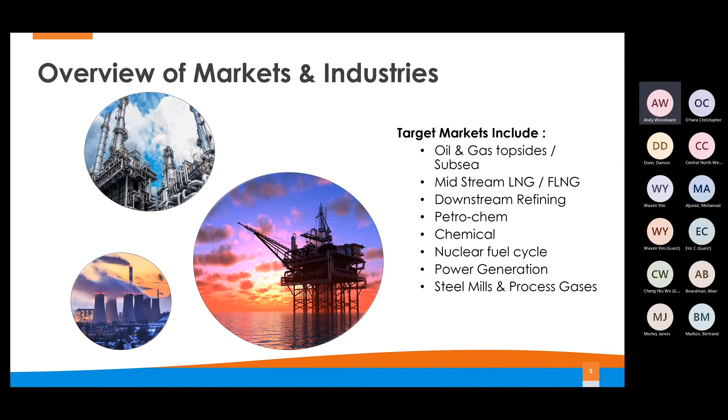The markets that we look into, as I say, cover all industries: oil and gas, petrochemical, chemical, refining, nuclear, power generation, the waste to energy as well. These are the principals that we represent across our portfolio. Myself and Tony, our primary responsibility is the IMI critical engineering portion, mainly with the CCI aftermarket control and choke valves in those industries. But we also have ATV valves, VE, Vermeer heat exchangers, Comproflex metallic expansion joints, Decotter HF Alki chemical valves, Quadax being triple offset butterfly valves, and then a couple of other vessels and catalysts companies that we also represent. But as I said, there is that synergy between all of these products.

Today's presentation is focused on CCI, IMI CCI. That's just a snapshot to show exactly what CCI can do. But I think most people on the call will probably know and understand who CCI are, the forerunners of critical application control and choke valves in the oil and gas and power markets. Aftermarket for the retrofits, upgrades, and the advances in the technology that they've been doing over the last few years has led us to where we are today, and today's presentation on additive manufacturing and the benefits of that in today's market for control valves.

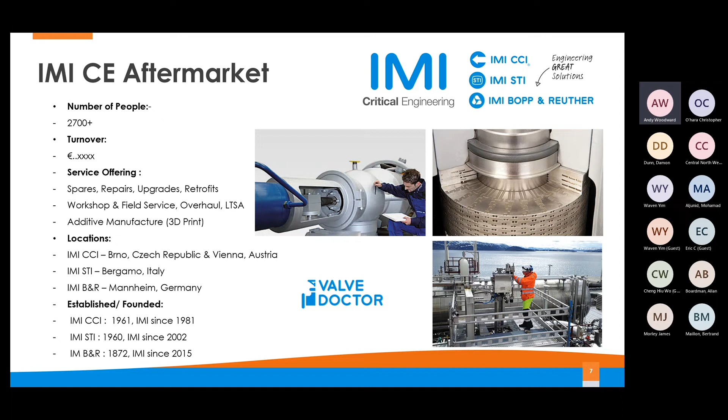So yeah, we provide that relationship between OEMs and end users. We've done it for the best part of 12 years now, so it's working. Any questions, queries or anything, I can be contacted for discussions after that.

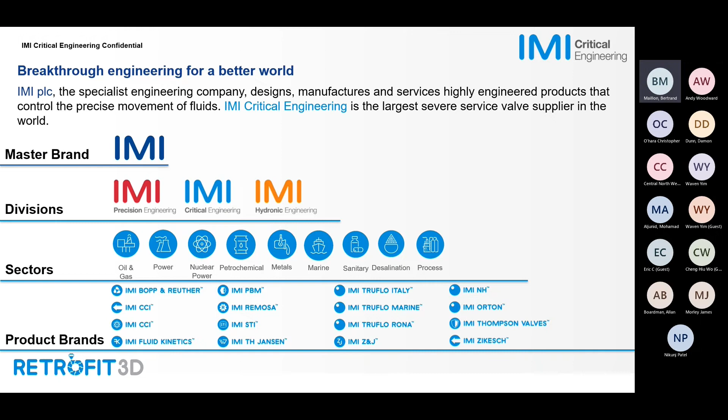Hydronics, which is in orange here, provides hydronic distribution systems used in residential and commercial sectors for energy efficient heating and cooling. And IMI Critical Engineering, in blue, is the division I represent today. We operate mainly in oil and gas, power generation, nuclear, petrochem, and the marine sector as well. Typical brands, as mentioned by Andy, are IMI CCI, but also IMI Bopp and Reuther, STI for the actuators, Z&J, etc.

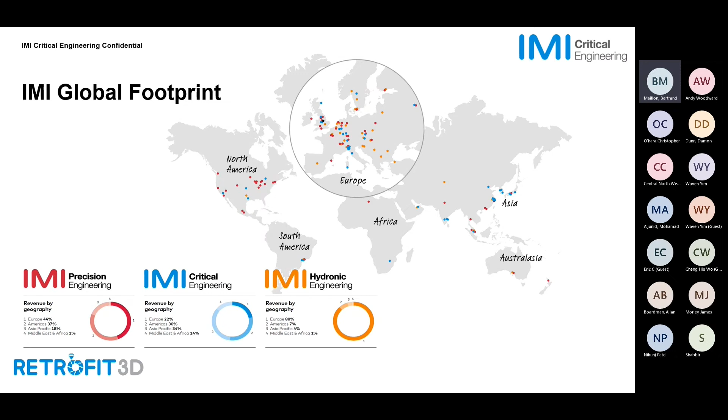Next, let's talk about the control valves themselves and Retrofit 3D, this innovation that uses additive manufacturing. Why we look at that: you on the call know control valves pretty well, but the challenge in these control valves is all about erosion, cavitation, leakage, even vibration, so severe sometimes that you can have parts separating and breaking up. All of that is linked to fluid velocity control.

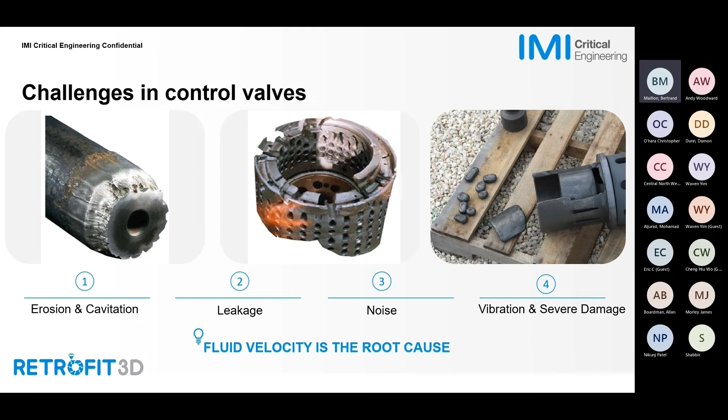I have a good analogy I would like to share. If you have a waterfall, you have all this water with high elevated energy, and then it drops below the cliff. This creates a kinetic energy that causes a lot of damage. What you see at the bottom of a waterfall is typically a big hole, right? That's this kinetic energy creating the hole continuously.

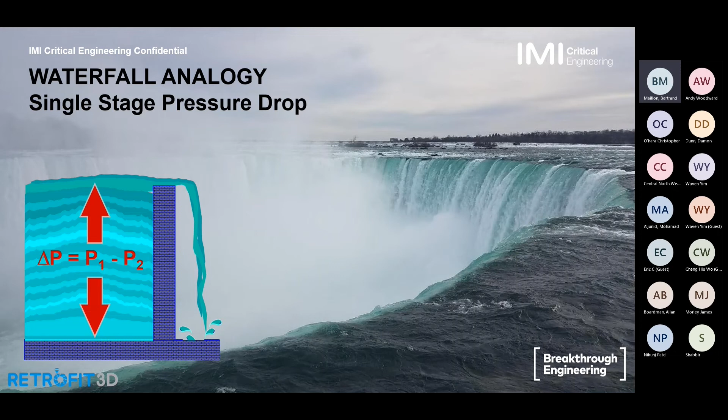And then there is multi-stage pressure drop. How to control this kinetic energy is to create a pressure reduction step by step. Imagine the water, instead of falling off a cliff like Niagara Falls, going down a staircase; then you would control the fluid and the velocity much better, and you would have less damage.

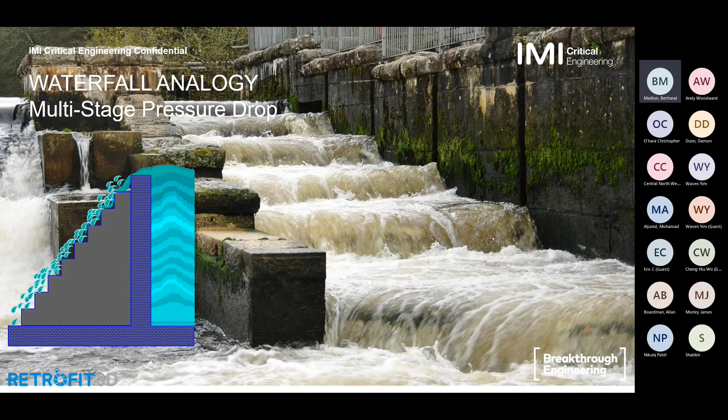This is exactly what DRAG technology does. It's a patented design that is almost 50 years old, that manages the pressure reduction stage by stage within the control valve, within the trim set of the control valve.

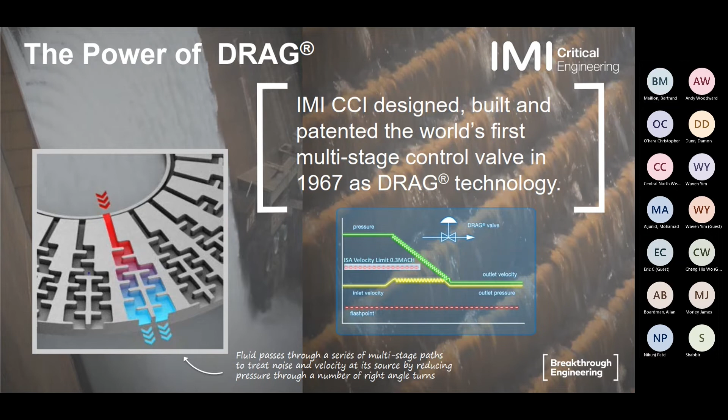So Retrofit 3D is about using this legacy DRAG technology of IMI Critical Engineering and reinventing the solution for the future. Using additive manufacturing, it's a trim-only replacement solution. With the technology, we can redesign a trim set more efficiently, in a more compact design, with better rangeability within an existing body. I'll show you how this can be done.

In essence, additive manufacturing allows a freedom of shape that the traditional process doesn't enable. It focuses primarily on the internals of the valves, like the trim, the seats, the stem, and the plug, which are non-pressure boundary components. All our pressure boundary components need to refer to an ASME class, and ASME is not yet at the stage where additive manufacturing is allowed by the code. So we are not talking about the pressure containing parts, but the internals, which is fine for additive manufacturing.

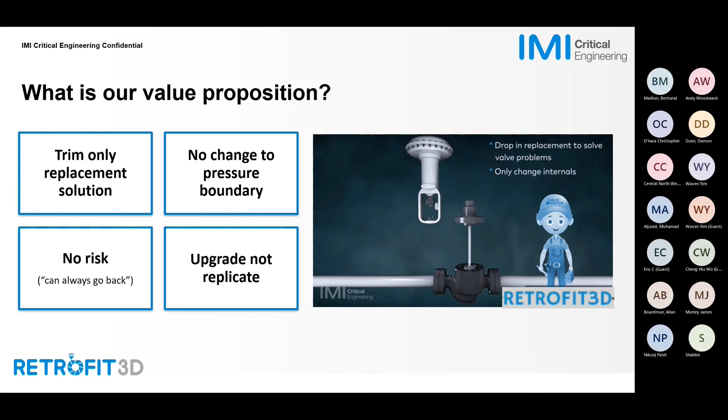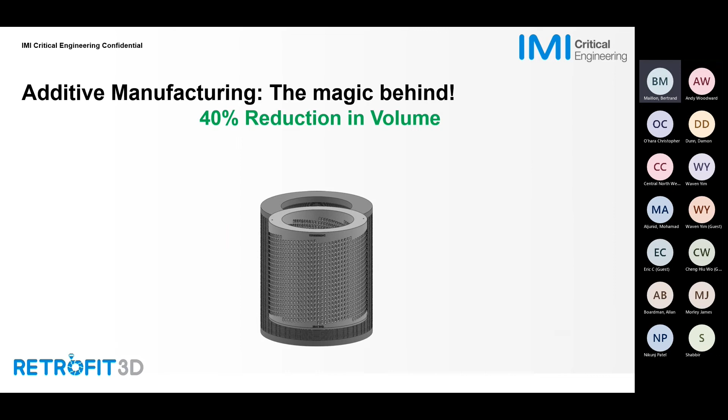Additive manufacturing, and this is the point I was making earlier. So with additive manufacturing, we can actually shrink significantly the volume of the part with the same characteristics. So we can really have a much more compact design. And this reduction in volume is really the game changer of additive manufacturing in retrofit activities for control valves.

I mean, retrofit has been there for some years now. It's not a new thing, but additive manufacturing is really the game changer because it allows this compact design. And I'll show you some examples of rangeability that we can give, or where we have had projects with high rangeability trims in the past.

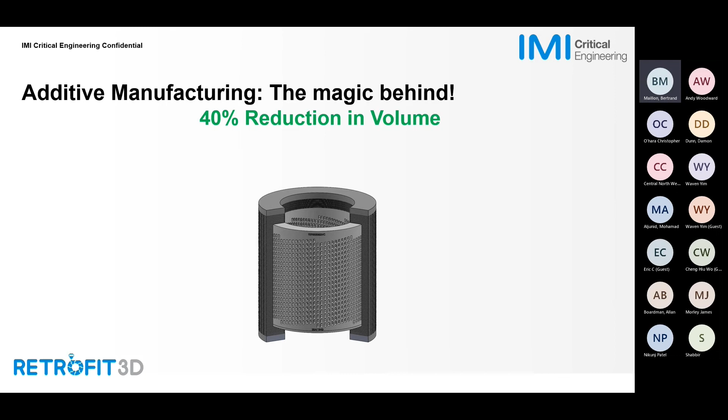Okay, but so first, what is additive manufacturing? So additive manufacturing is really a process where everything starts with a 3D or CAD model, and this can be as complex of a part as an engineer can think of. And this is also the beauty of the retrofit 3D solutions, is that we can really tailor-make every single trim to a specific process condition.

And typically, in fact, when you have this leakage or this cavitation, these damages in the valve, most of the time it's because it was not designed to be operated the way it is operated today. And so this is really where, with the retrofit 3D using additive manufacturing, we can redesign the trim and tailor-make it to the existing and current process condition.

So again, starting with the 3D CAD model, it's then sliced by a slicing tool, sent to a printer, and I have some pictures just after. The printer will print the different layers one after another on a powder bed machine, for instance, and then the part will be completed with some post-treatment in some cases. So the typical post-treatment would be removing of supports or grinding or a heat treatment, for instance.

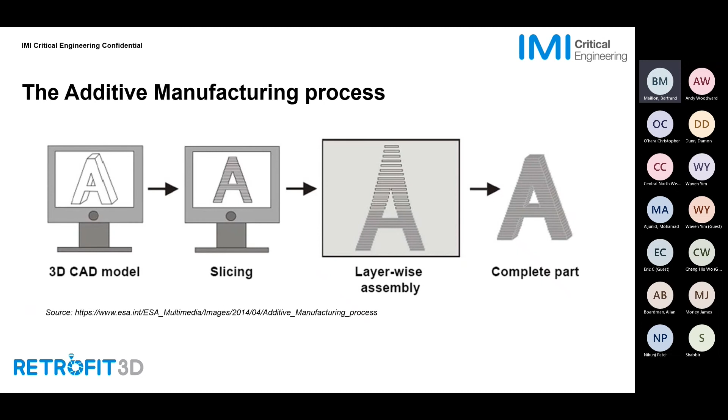And one thing I wanted also to highlight here is additive manufacturing is known in our general, everyday life for creating plastic tools and these kinds of things. But this can also be quite serious stuff when we are talking about metal printing. And I'll have some examples today as well.

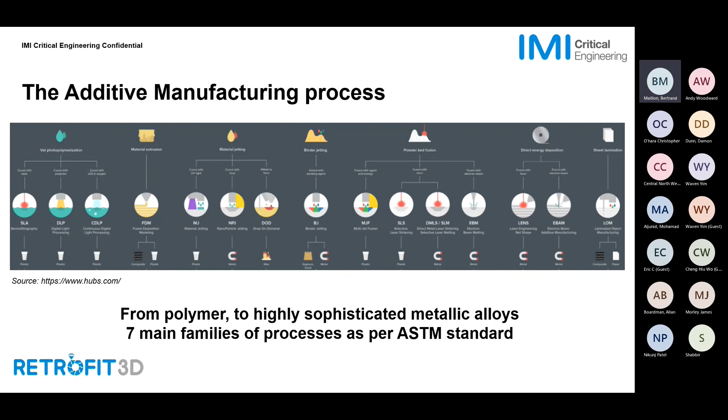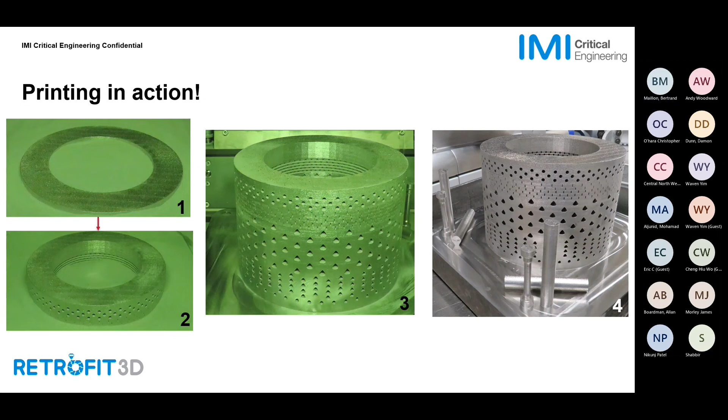So really the 4 advantages of additive manufacturing: first, design optimization. So again, being able to tailor-make a trim set to a specific process condition, optimizing the design. If you need, for instance, a very fine low flow control, and you still need some rangeability on the full stroke opening, this is possible. We can do 2-in-1 solutions where you have a slotted cage and also a drag-type multi-stage control element at the bottom. So this really creates the opportunity for a design that is tailor-made to the process condition.

It's also complex shapes and complex geometry. Typically the trim sets and the disc stack are complex geometries by nature, and this is how it can really enable new opportunities. A 40-turn disc stack is not even possible with traditional manufacturing. With additive manufacturing, we can get these kinds of tortuous passages up to the maximum allowable real estate within the cage itself, and have up to 40 turns, which is not at all possible with EDM.

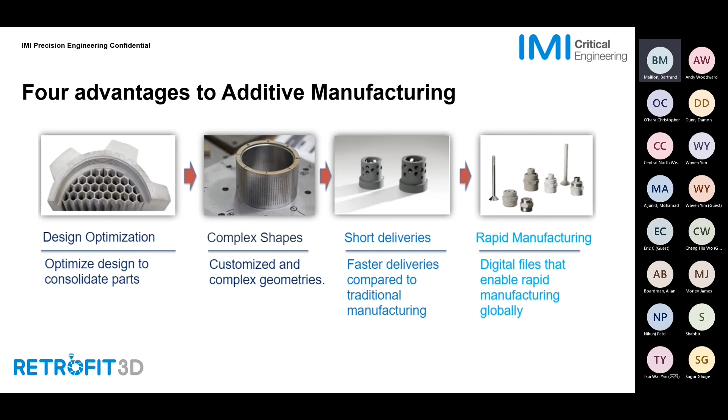And so this is really the breakthrough that additive manufacturing is bringing to the industry. And if we are talking, for instance, about the marine industry or the oil and gas industry, that are perhaps the most advanced of the industries where we have these large critical assets, that's where these industries are paving the way for what's called digital warehousing, and creating a new ecosystem of supply chain, where you have a CAD file, some powder to print, you print, and then you deliver as close as you can to the point of use. And so this is the typical new ecosystem that is being driven by the industry using additive manufacturing.

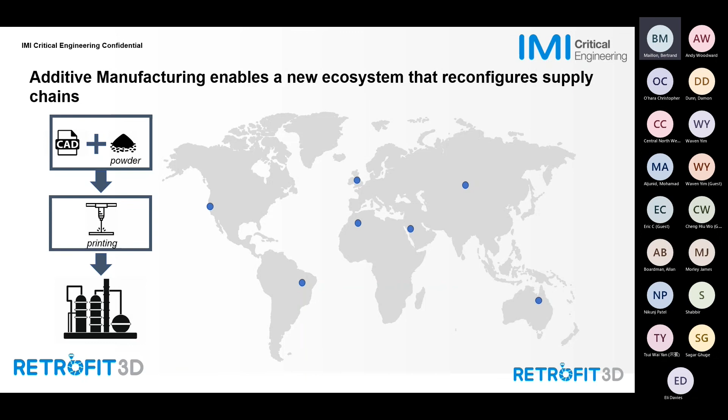And so the customer here was having some change in process condition. He needed to operate the valve at a lower flow, and so that's where we upgraded the valve with a drag technology, and you can see the new design on the right-hand side with a cage, 16 stages in this one, to provide rangeability and better control of the high pressure drop that this application needed. So this is one of the very first retrofits we did when the initiative started back in 2019. Since then, we've done many more retrofits, and we've also worked on other applications. This was also in Inconel 718 type of material, in case you're wondering what material was used.

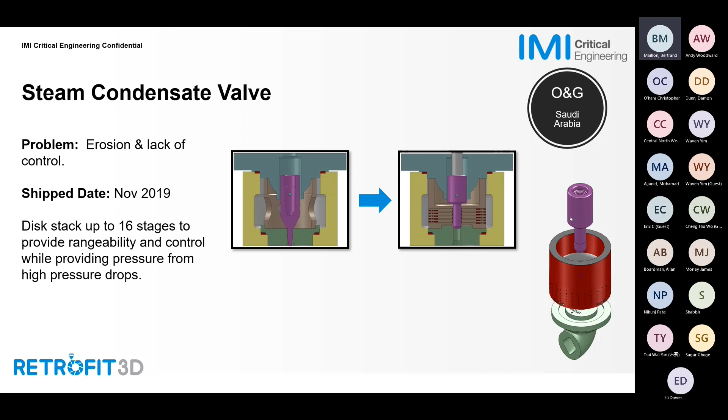This one is interesting as well. So this is a choke valve. Again, it's in Saudi Arabia. This one is more recent. This was installed in June 2021, opened up in January 2022, and then we changed the seals, and the trim is back in operation. So you can see here the original parts that were used for this application.

And here we used additive manufacturing to tailor-make this design and really create a two-in-one solution, as I was mentioning earlier. So really having these passages at the bottom where there is the low opening flow, being able to better control the flow and the velocity at the low flow, and then still have this high flow when the stroke is maximum. I think this is a good example of the flexibility of the design, because such a part is not possible at all with a traditional EDM process. And so here, additive manufacturing really brings a new opportunity for answering customer problems.

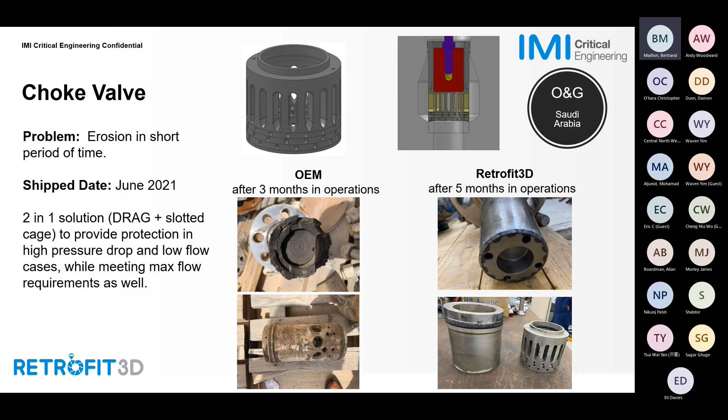Another one here, it's a steam letdown valve. I was talking about heavy vibration earlier. So again, this was a customer, this time in the US, an oil and gas refinery, who was facing some issues with their OEM parts. Heavy vibration, so much so that even the plug and stem separated. So we looked at the valve and how we can redesign the trim inside the valve itself. We added a couple of stages to reduce the vibration and manage the kinetic energy better. And so this is one of the Retrofit 3D designs that you can see here.

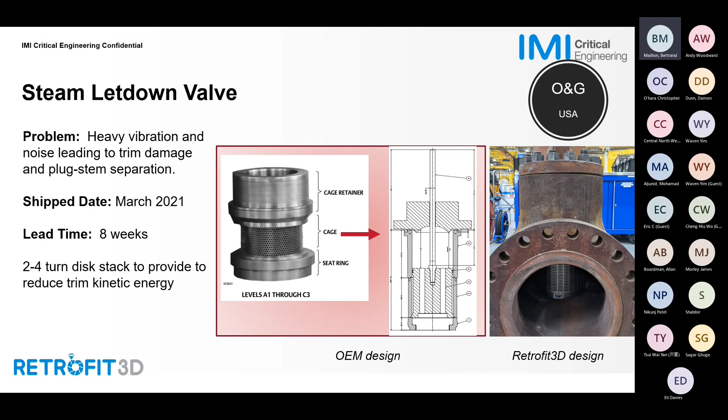So I talked about the trims themselves and what we can do, but this is only the tip of the iceberg, I would say. With additive manufacturing, the opportunities are beyond the drag and beyond the trim set in control valves themselves. For instance, we've done some seat baskets in the past, where we needed to have some pressure reduction stage within the seat basket itself to better manage the flow inside the valve. Some baffle plates as well. So there are really great opportunities with additive manufacturing to tailor-make components and address specific flow conditions in specific applications using this technology.

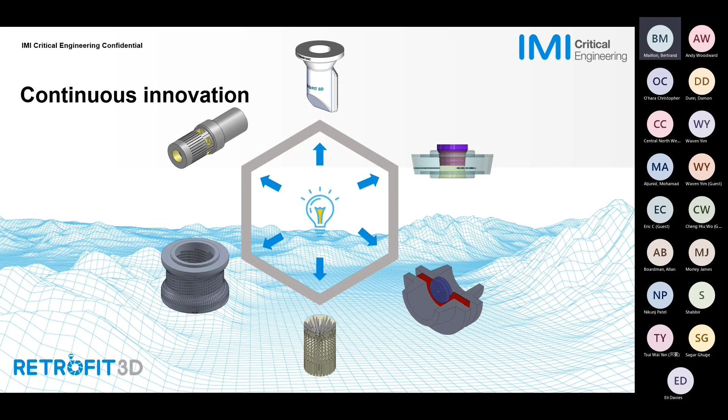Okay, so that's it for the presentation.